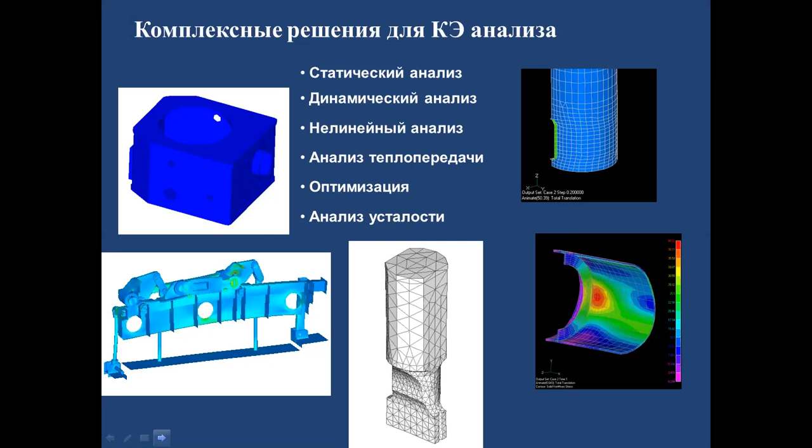Существует ряд программных комплексов, в теоретической основе которых лежит метод конечных элементов. На своих слайдах вы видите названия данных программных комплексов: ANSYS, Патран, Настран, Fatigue. Все это программные комплексы конечно-элементного анализа.

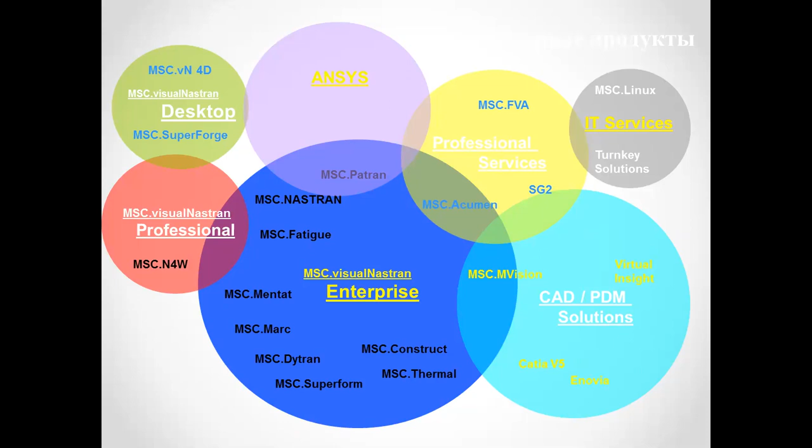Также есть трехмерные конечные элементы. Есть симплекс конечные элементы, а есть второго порядка.

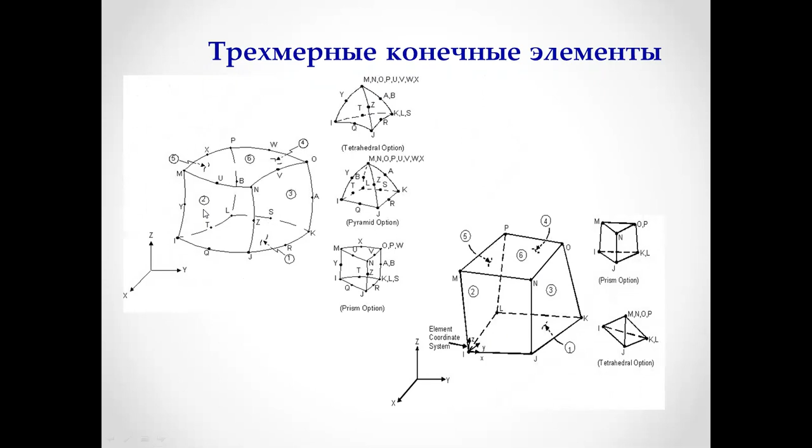Конечно-элементный анализ состоит из начальной, то есть препроцессорной подготовки. Мы должны определиться с расчетной схемой, с типом конечного элемента, подготовить область решения, задать ее в ANSYS, определить тип конечного элемента, свойства материала и разбить область на конечные элементы.

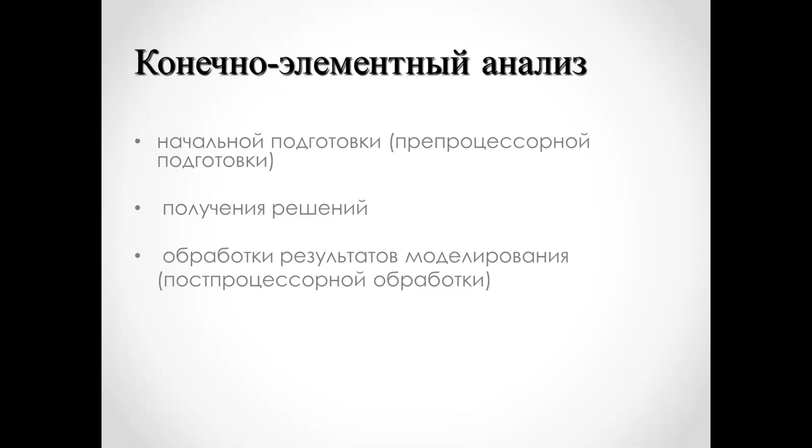На этапе получения решения нам необходимо задать граничные условия и выполнить решение. Следующий этап – это этап обработки результатов моделирования, этап постпроцессорной обработки. Здесь мы анализируем полученные результаты, можем представить их как в графическом виде, так и в текстовом.

Препроцессорная подготовка. Что сюда входит? Это создание модели изделий, создание сеточной модели, контроль качества сеточной модели, определение данных и ограничений.

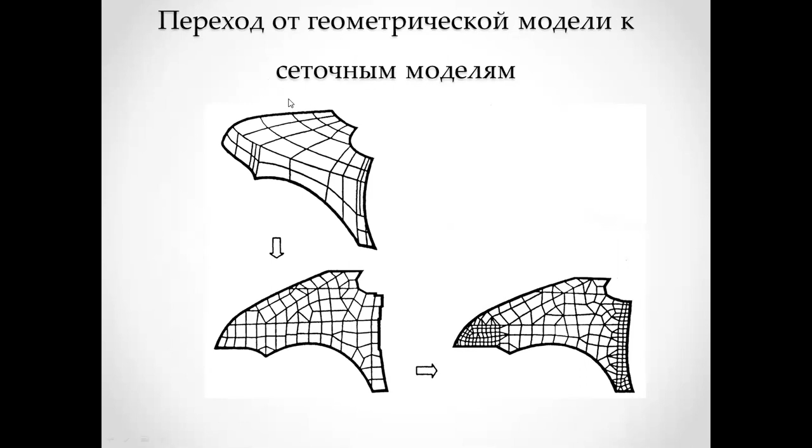Далее мы переходим от геометрической модели к сеточной модели, то есть строим конечно-элементную модель. Мы можем строить ее различными методами.

Как мы разбирали на лабораторных работах, размер конечного элемента вблизи неровности берется меньше, чем там, где идут прямые границы.

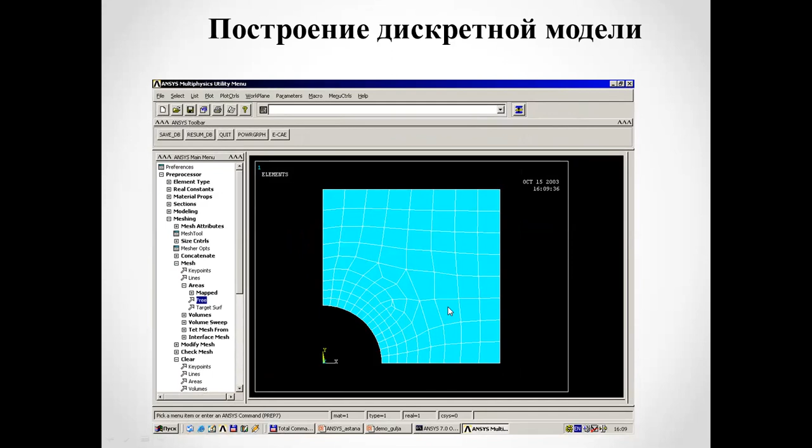Также мы должны определить данные и их ограничения, то есть типы элементов, свойства материала, параметры узлов, нагрузок, граничные условия.

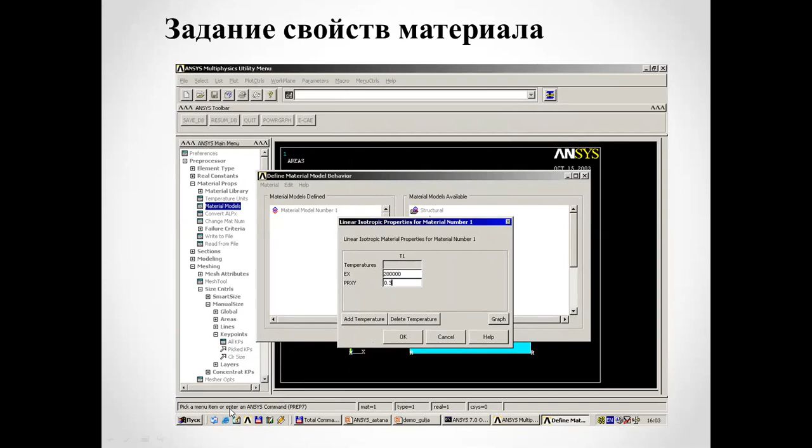Следующая задача – это управление процессом решателя. Полученные результаты будут визуализированы в окне данных. Предельные значения результата будут показаны в области выходных данных протокола анализа. Решатель сформирует текстовый файл выходных данных, который может открываться любым текстовым редактором.

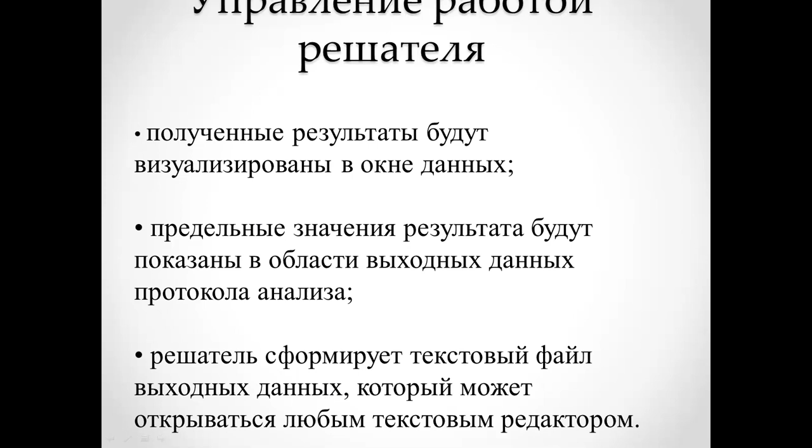Постпроцессорная обработка результатов – это графическое представление значений результатов, анимация любого из графических режимов, листинг результатов, интерактивное окно с числовыми результатами. На экранах вы видите, как можно получить картину напряжения в графическом виде.

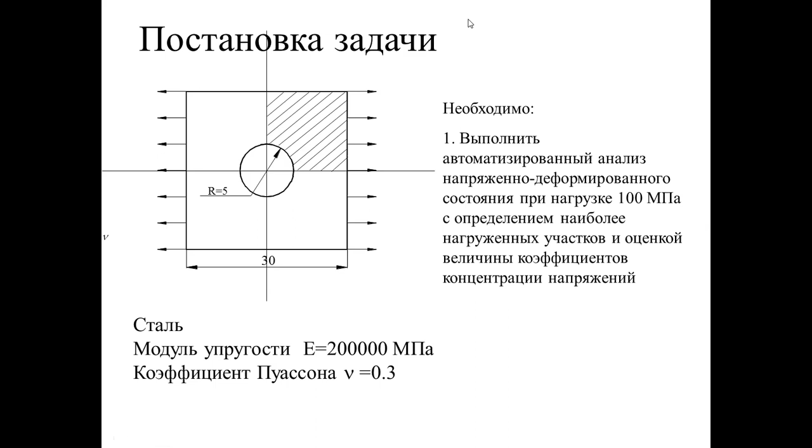Ваша задача. Вот вам задана постановка задачи: необходимо выполнить автоматизированный анализ напряженно-деформированного состояния при нагрузке 100 мегапаскаль с определением наиболее нагруженных участков и оценкой величины коэффициента концентрации напряжения. Также вам заданы свойства материала.

Далее вы должны ответить на следующие вопросы. Сколько способов построения модели существует? Как влияет размер конечного элемента на результаты расчета и почему? Какие операции можно выполнить с графическими объектами в программе ANSYS? Какие основные процедуры выполняются на этапе препроцессора? Какие основные процедуры выполняются на этапе процессора и постпроцессора?

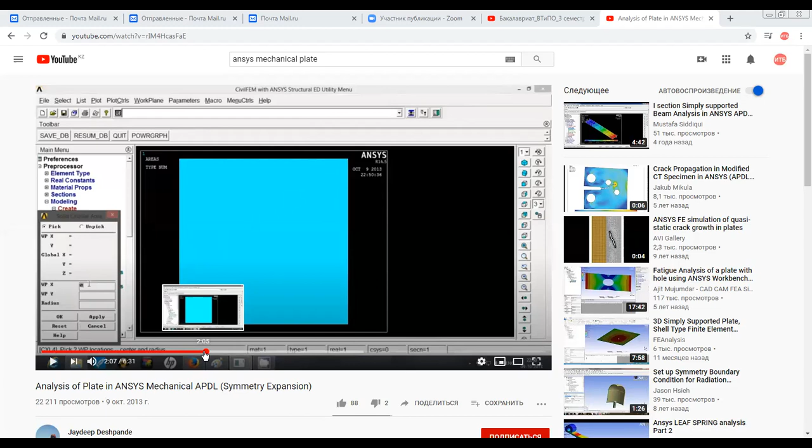Прежде чем мы приступим к работе, мне бы хотелось показать вам небольшой видеофильм о работе в ANSYS. Сейчас мы рассмотрим один видеопример, который разработан Jaydeep Deshpande, называется «Analysis of Plate in ANSYS Mechanical APDL Symmetry Expansion». Данный пример наглядно проиллюстрирует расчет напряженно-деформированного состояния пластины с вырезом. Приступим к просмотру.

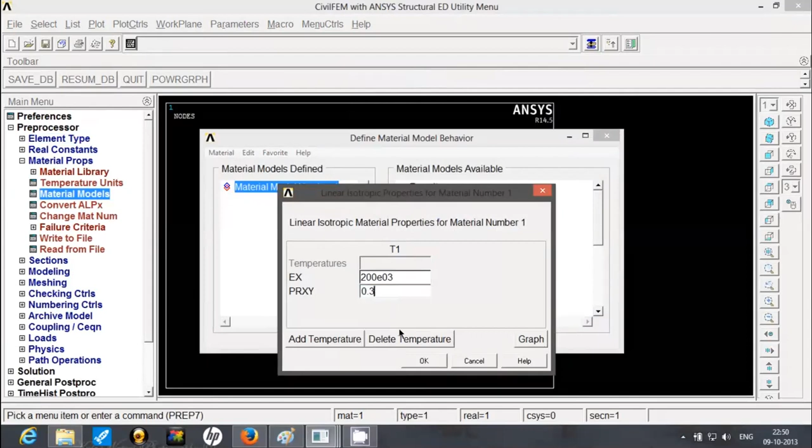In this case, we are going to create areas and then mesh the areas to obtain nodes and elements. First we'll begin with creating the first quarter, or the right quarter, of the plate.

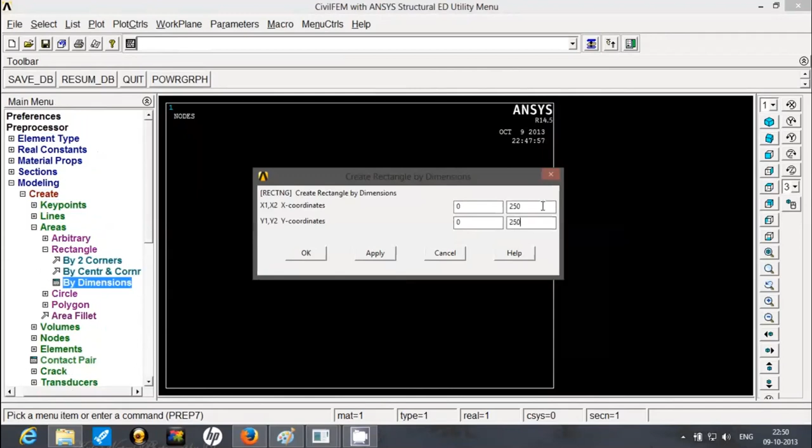Go to areas, rectangle, by dimensions. The bottom corner is going to be the origin, so the first coordinate is 0,0 and the next coordinate is 250,250. That will create the quarter.

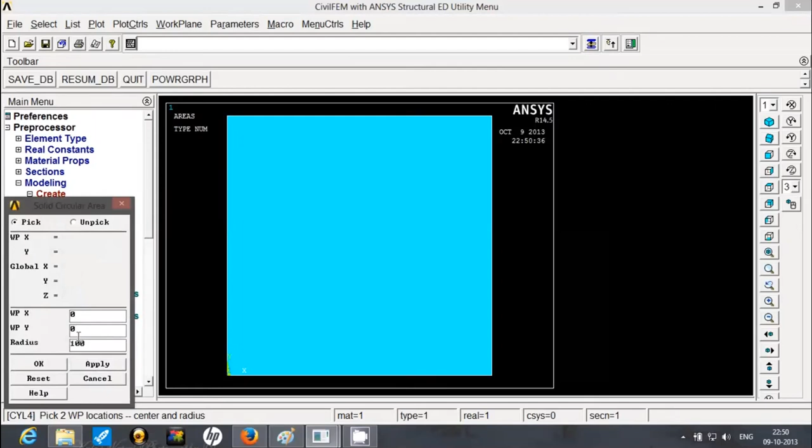To create the hole, we are first going to create a solid hole and then subtract it. So to create a solid hole, go to circle, solid circle. It is at the origin as the center, with a radius of 100 mm. Click OK, and you have it over here.

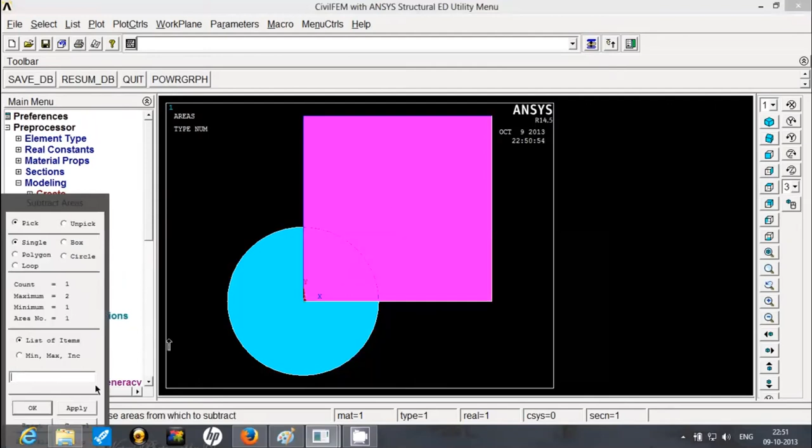Now to create the hole, we are going to subtract the circle from this area, or the square. To do that, go to operate, booleans, subtract areas. From this area, you have to subtract this area. Click on OK and you have the quarter ready with you.

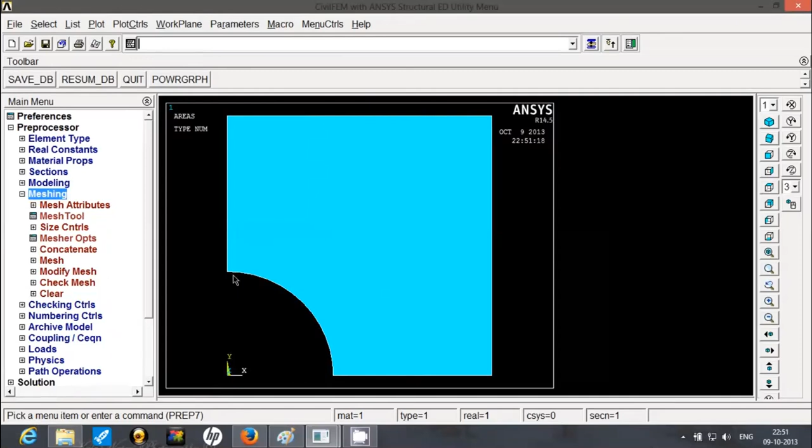Now we'll go and mesh this. First we'll have to see what mesh would look good. The mesh has to originate from this curve, since we are going to fix this curve, and it has to uniformly pass to these two edges. We don't want any of the mesh going from this bottom edge to this vertical edge, since these are going to be the symmetrical edges.

So to do that, first we'll have to concatenate these two lines, so the mesh will originate from this curve and merge into these two edges.

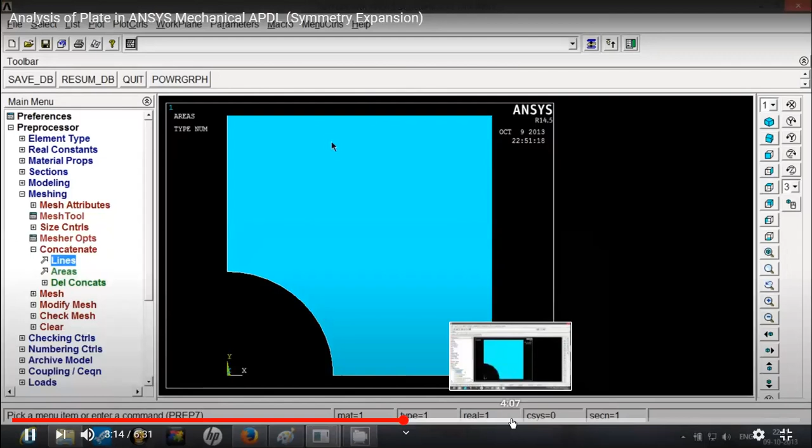Now we'll mesh it. Go to mesh tool. Since we have mapped it, go to map, click on mesh, click on area, and click on OK. So it will mesh it, but the mesh is not so good.

To make the mesh better, go to refine at nodes, refine, and here you have to pick all. You can select the intensity; I'll go with 2 and click on OK. Now I have a nice mesh over here.

Now let's move on to the boundary conditions. Go to loads, define loads, apply, and first we'll go with displacement. We'll first fix this curve, beginning with picking on lines. We'll pick this line, click OK, and fix it by setting 0 value for all degrees of freedom.

One important point to note is that the vertical edge and the horizontal bottom edge have to have symmetry with respect to these two edges. To do that, we have an option over here of symmetry boundary condition, symmetry BC.

Go to that and select on lines, select these two lines, and click on OK. As soon as you do that, you can notice an S appearing there, which tells you the symmetric condition has been applied. Now we'll apply the force.

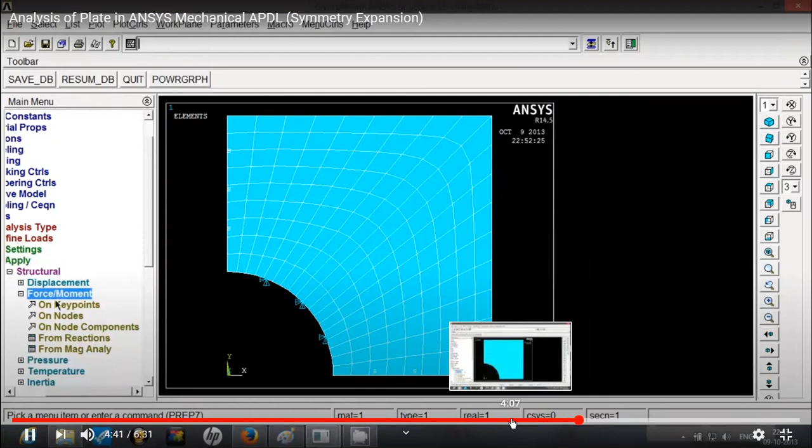To apply the force, click on nodes. To apply the force on the entire edge or entire length, we have to select box over here. Start with this point and drag your mouse down, so it will select all the nodes in that box, and click on OK.

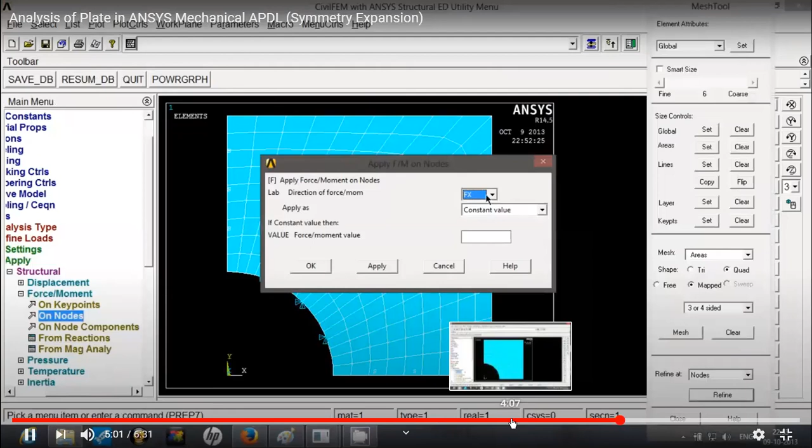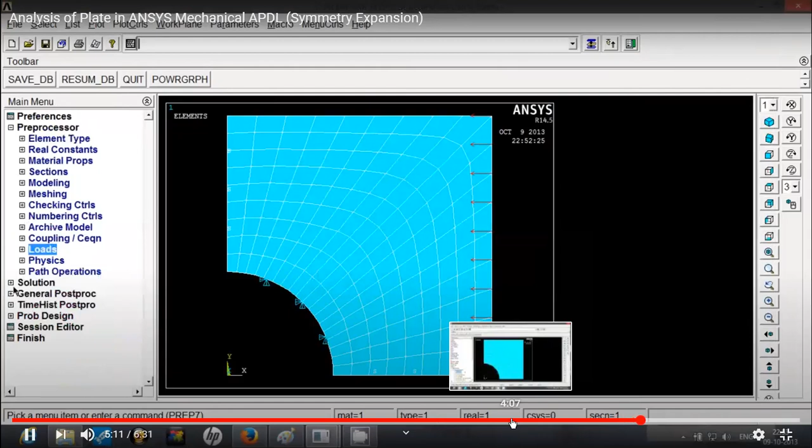The value is 1000 Newton, compressive, so we have to add a minus sign over here and click on OK. Our force is applied, our system is ready to be solved. Now go to solution, solve, current load step, and click on OK.

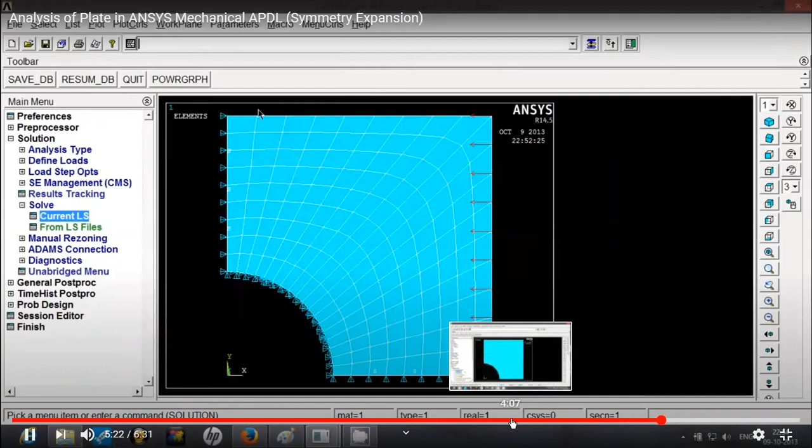Our solution is done. Before we actually see the results, first let's expand the geometry. Go to plot controls, style, symmetry expansion, and select the first option, periodic or cyclic symmetry. Since we have drawn the quarter, select the first option, click on OK. Now here you can see the entire plate.

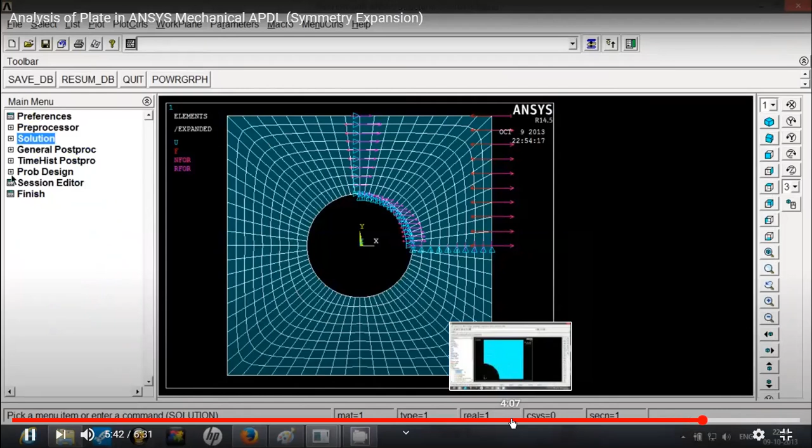Now let's view the results. Go to General Postproc, plot results, contour plot, nodal solution, and we'll view the displacement vector sum. Click on OK. So here you have the results.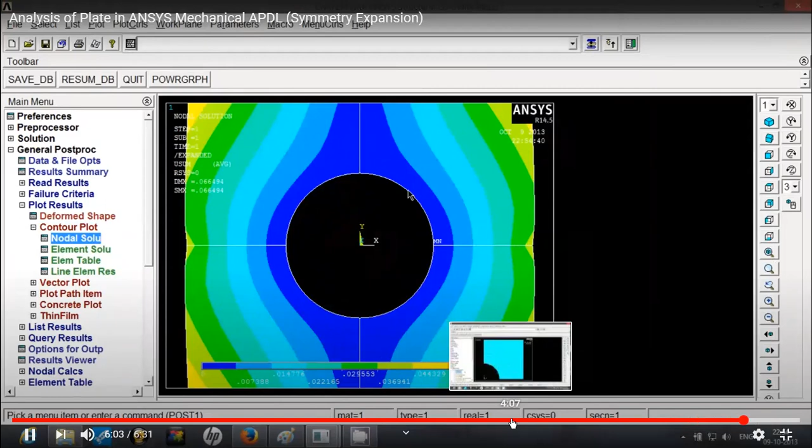If you forget to set the symmetry boundary condition, you are going to observe a tearing along this edge, and you'll see some overlap along this vertical edge. So it is most necessary to break down your entire geometry into symmetric equal parts, then expand the symmetry by applying the symmetric boundary condition and geometry expansion.

If you have any doubts, feel free to ask.